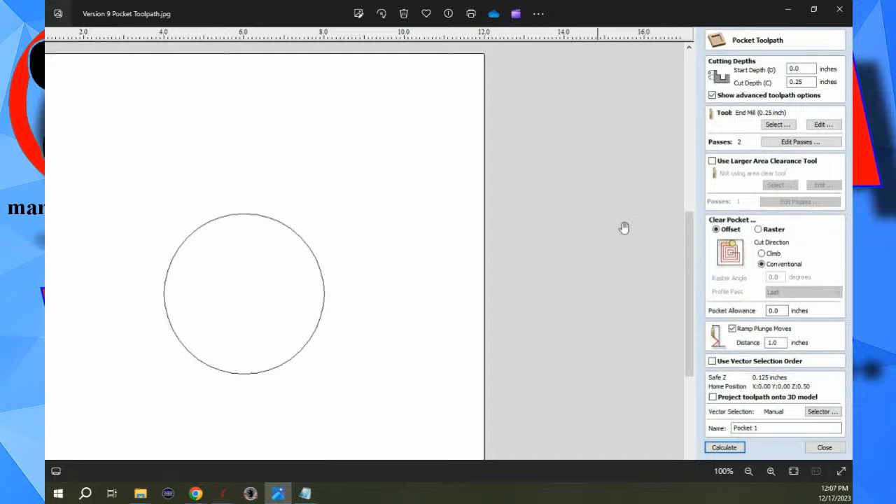And so you get into a situation where now I don't have an older version on this computer, so I had to take some screenshots. In the old version of V-Carve and Aspire, this is what the form looked like. You entered your tool up here. This is on a pocket toolpath. You set your cut depth over here. Then you had one checkbox to use a large area clearance tool. Then you would select that tool, and that was your only option. And so these older videos reflect this form.

In the V-Carve toolpath, it was much the same thing. You selected your V-bit up here, then you had the option to use a flat area clearance tool, and you could select one tool, and that was it. So as a consequence, those older videos reflect that same situation.

Well, now we have come into version 11.5, and if I select that vector and go into a pocket toolpath, the form has changed pretty dramatically. In the case of this pocket toolpath, I can select my basic tool that I'm going to use to pocket this out. But then I can come in and add another bit. For instance, let's say an 1/8 inch end mill. We'll select that and it adds it to the same list.

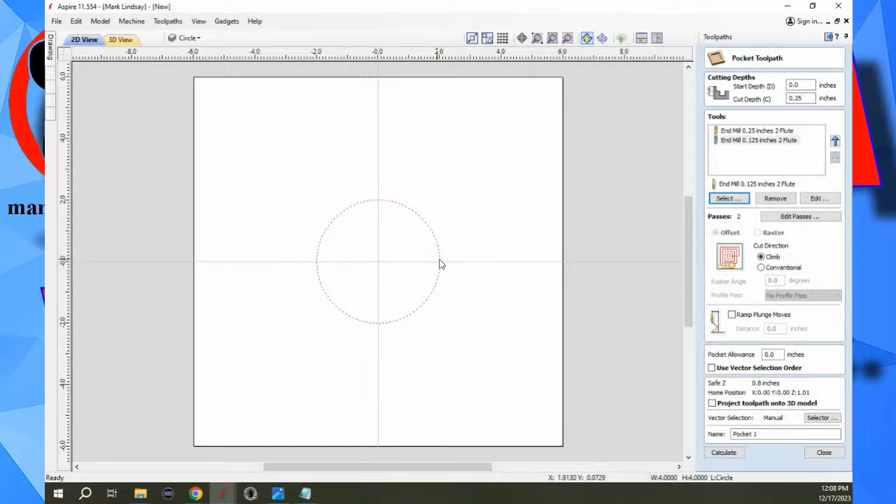I'm no longer restricted to adding just one extra bit for a large area clearance tool. I can add 4, 5, 6 bits. I haven't found a limit yet. So we've got a little bit more flexibility here. Now, if I go ahead and calculate this toolpath, we see that it makes 2 separate toolpaths. I had a question the other day in a comment on YouTube asking, is this normal? And the answer is yes, this is normal.

What it's doing is it's making one toolpath that uses that 1/4 inch end mill. Then it's making another toolpath that's using that 1/8 inch end mill. And that's exactly what a large area clearance tool is supposed to do. If you look at the title of this toolpath, it says Clear 1. That is your clearance toolpath, and that's fine. This one here is your final toolpath. That's using that smaller bit that's going to get in and trim right close to that vector as much as it can.

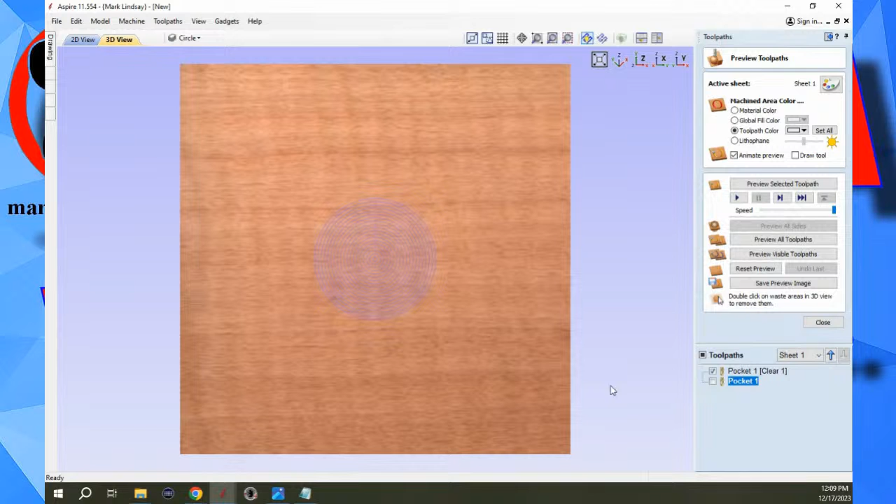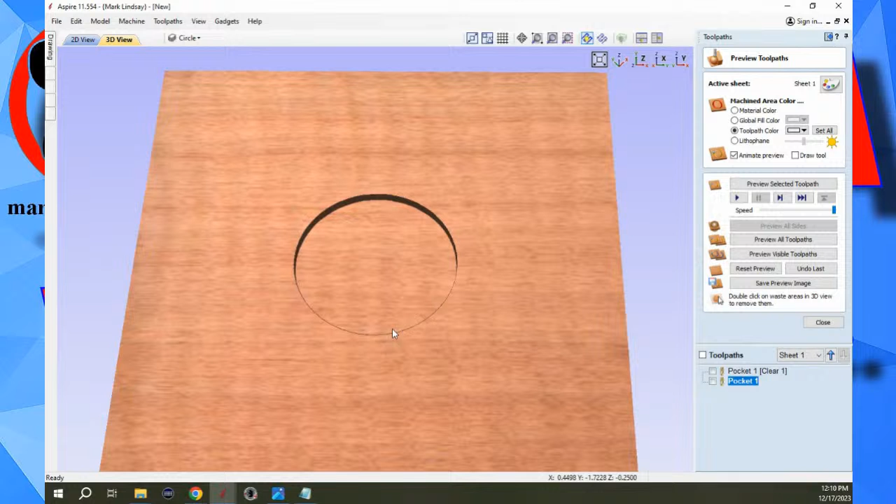Now I can turn off the visibility on this toolpath and we see how much smaller this clearance toolpath is. If I run this toolpath and kind of rock it off to the side so that you can see it, that's cleared out the bulk of the material. Now, if I preview this one, it's going to do that very slight cleanup profile pass. On something like this, where I've got a 4-inch diameter circle, it's not really necessary to use two different tools. I could reset my preview, go back into my pocket, and just totally eliminate this tool. I can just remove it.

A little word here about what I'm selecting. You'll notice I have my 1/8-inch end mill selected, and it's listed down here. If I click on my 1/4-inch end mill, now it's listed down here. This is done so that you can reset parameters on each of these bits individually. So if I need to change a feed rate or a depth of cut based on my material, I can just select that tool, come over here to edit, and edit the parameters of that tool.

So if I need to change my feed rate or my plunge rate, or maybe even my pass depth, if for instance I'm cutting in foam, I can go a lot deeper than a 1/4 inch per pass. I could go a 1/2 inch per pass.

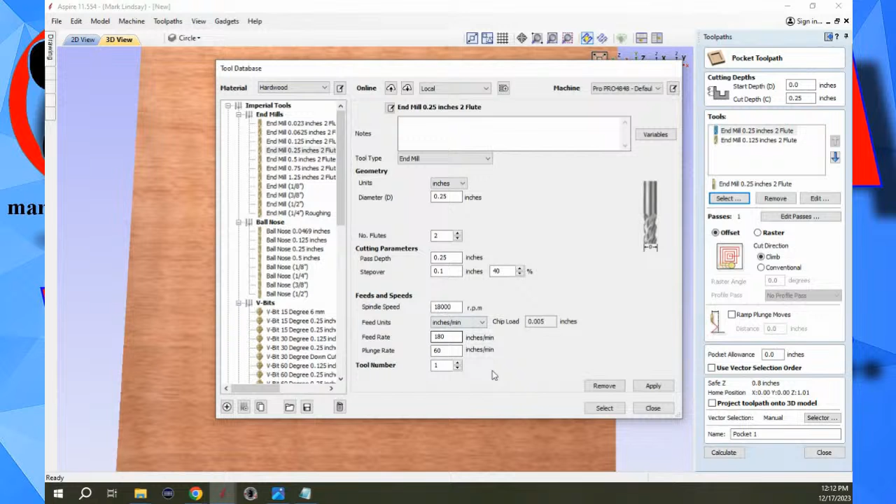I probably don't want to do that. So I'll close that without making any changes, and I'll edit those parameters using the edit button. And again, that affects this toolpath only. Okay. And it's similar with the V-Carve toolpath.

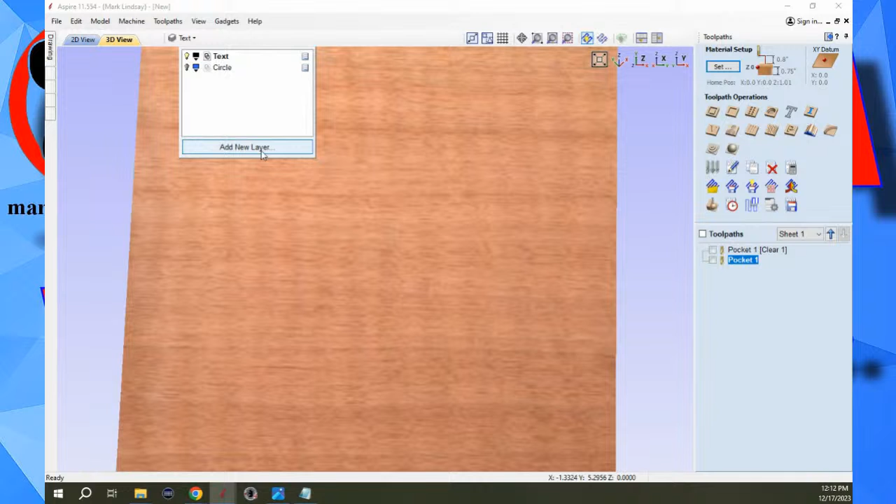Now I'm up here in my circle layer, but I also have some text. So let me close that, make text my active layer, click off, and now I have some text out here. It's similar with a V-Carve toolpath in that I can come over here and I can click in my V-Carve toolpath. I've got my vector selected, and now I'm going to select my V-bit. I am going to cut to a flat depth.

Let me stop right here and say that carving to a flat depth, there's some kind of misunderstanding out there about carving to a flat depth. I'm going to get into that in just a minute, a little bit more thoroughly here. But basically what I'm doing is I'm limiting the depth of that cut to 0.1 inches, not quite 1/8 of an inch, and about 2.5 millimeters deep is what 0.1 inches is. So okay, I'm not going to go any further just yet.

I'm also selecting a 90-degree V-bit, and we notice I have use clearance tools here. I've got it checked. I've got a very large tool entered in that. That's way too big. This 1/2 inch diameter 2-flute end mill, there's no way that's going to fit in there and clear anything out. It's 4 inches tall, but that's still, it may fit here. It probably won't. So I've got that tool selected. I'm going to remove it.

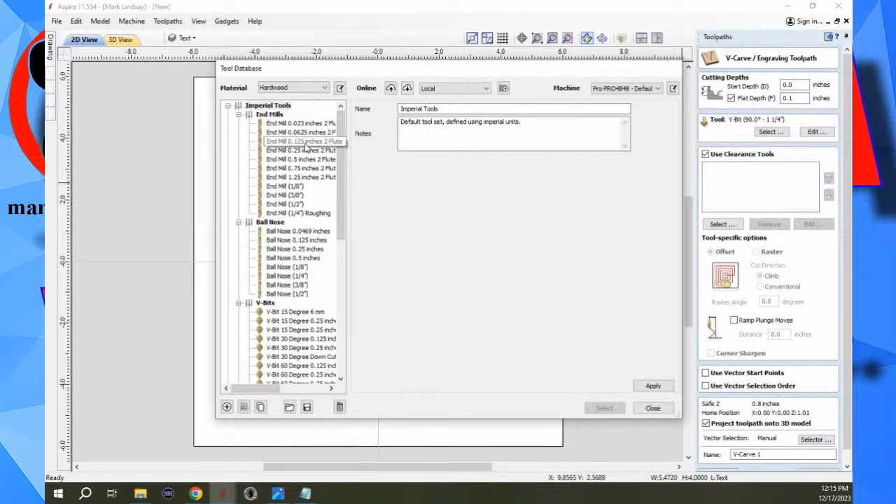Now I'm going to select another tool which will better fit within that text. And I think that's probably my 1/8 inch end mill. I'll select that. So now what's going to happen is this toolpath, when I calculate it, it's also going to calculate two separate toolpaths, one for that 90-degree V-bit and one for this 1/8" end mill. This is going to be the V-Carve clear toolpath. So I've got 2 bits for this toolpath.

Now, down here we get into tool-specific options. These tool-specific options will affect the clearance tool only. Whatever I set down here will not affect the V-bit. The V-bit is going to do what it has to do to carve this text out to a depth of 0.1. So this only affects this 1/8" end mill. Okay.

I have a choice of using an offset strategy, which means it's going to carve in a more circular pattern, or I can use a raster strategy. With a raster angle of 0, that means this bit's going to go back and forth and clear out this way. I don't want it to do that. I'm going to go ahead and go vertically. So I'll change my raster angle to 90 degrees.

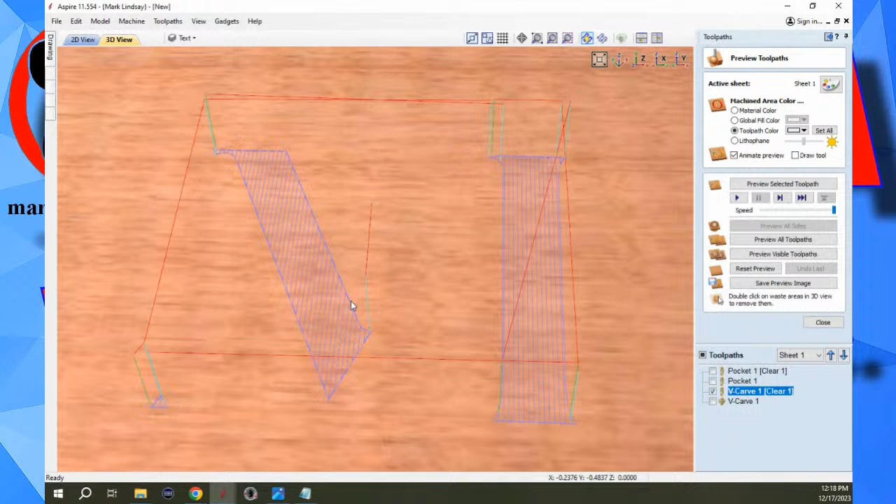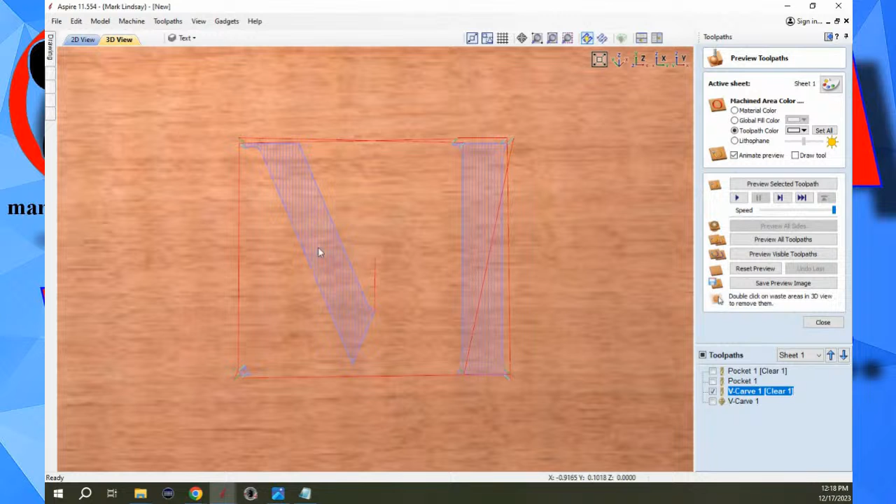When you're attempting to read a toolpath, just know that the red lines represent rapid moves. These rapid moves are with the bit lifted up out of the material. So we're going to start with my XY0 right here in the center, and it's going to lift up, go back to a straight Z view. It's going to lift up, move down here, then plunge in and start clearing this area out. Let me rock it back again here.

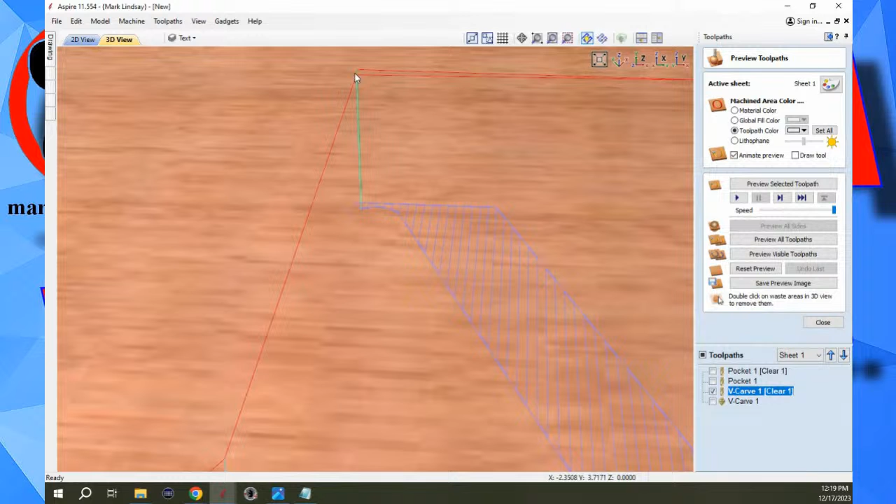And you'll see this light blue line. The light blue line is a plunge move. So it's going to rapid over. It's going to plunge down here and start clearing this out. We come over here and you'll see a green line. A green line is a retract. It's going to retract out of the material here, then rapid over to the next position.

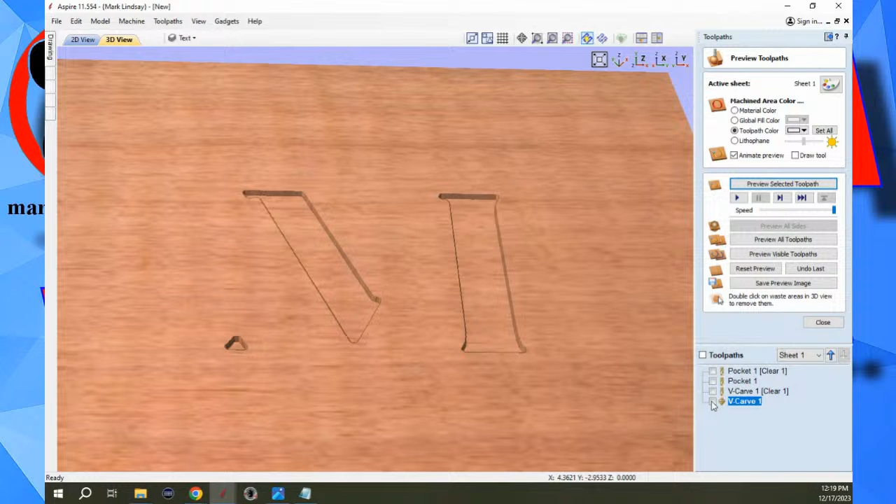So that's enough out of me on that. Let's go ahead and preview that one. And we see it has cleared out everything that that bit can fit down into. Now we'll come over here to the V-Carve toolpath and we can read what it's going to do. Again, the same thing. It's going to come over from my XY0 and it's going to go over to this side first.

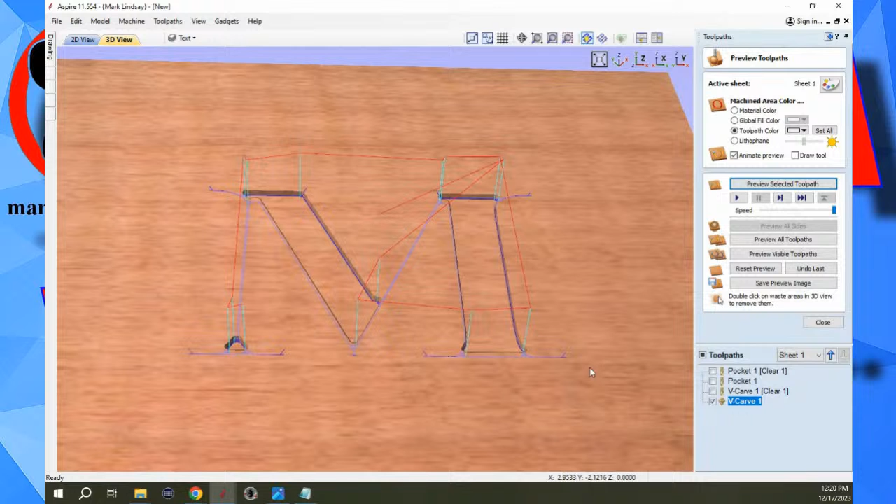And the dark blue lines are where the cuts are actually going to be. So it will do a little bit of clearance in here, but it will cut out my square corners, come back up around this way, retract out, and move over to the next position and start carving there. Let's go ahead and preview that. And we can see that's what it's done.

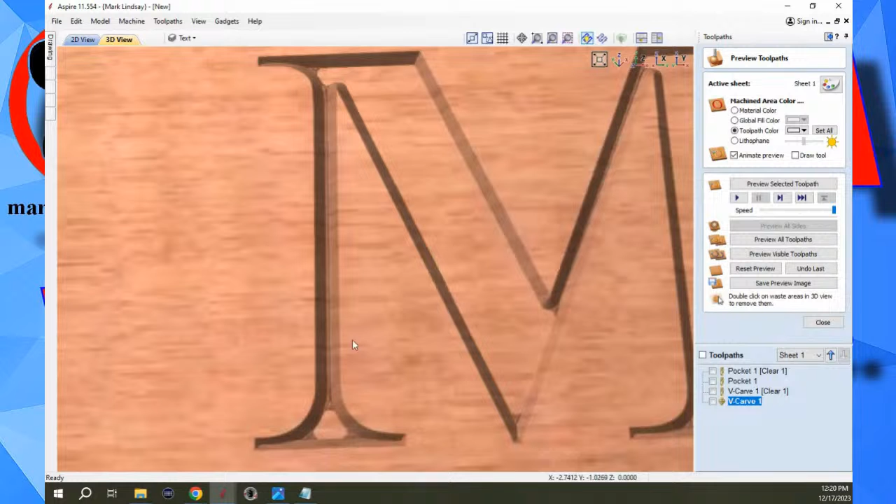You do not have to use clearance tools. You can allow that V-bit to clear this entire thing out. That will save you a tool change. But what you'll end up with, if we come in here and look real close, we can see a lot of ridges in here where that V-bit went back and forth to carve out this area that was too small for that 1/8 inch end mill to get into.

Now, depending upon the size of your text, that may not be a big deal to you. That may be perfectly acceptable. If you're going to fill this with a solid color of epoxy, that would be just fine. So it depends on what you're going to do. I generally find that using a sanding brush and a drill, or the Scotch-Brite radial sanding discs, is more than enough to clean this up in these smaller, tighter areas that are probably going to be painted anyway.

But it's very obvious that some sanding and cleanup happened in these larger areas. So that's when I tend to use a clearance tool. Not only that, this machine's a lot faster with a 1/8 inch bit than it ever would using that V-bit to clear all this out.

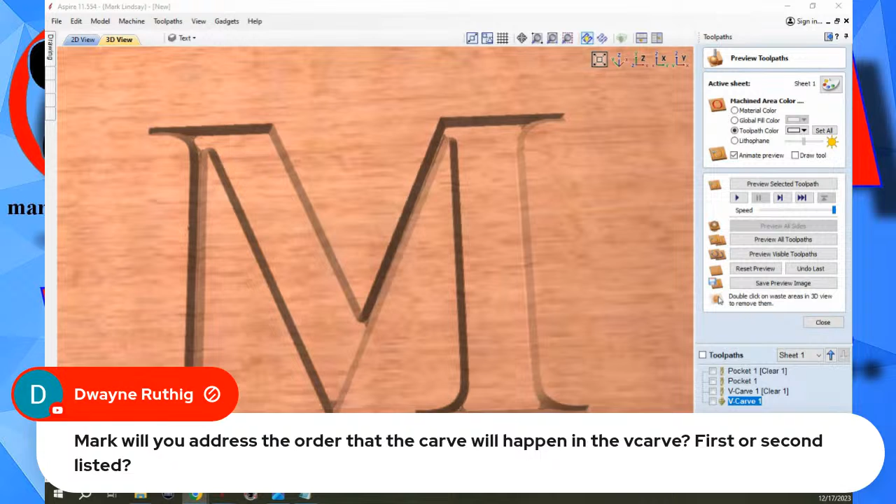So now I see a question out here. Dwayne's asking, will you address the order that the carve will happen in the V-Carve toolpath, first or second listed? I assume, Dwayne, you're talking about within the toolpath itself. The order that they're going to be calculated in, the V-bit will always be the final carve. It will always be listed last, without the word clear and then 1. That's always going to be your V-bit. Your clearance bits are always going to be the end mills you select.

Now, if I add another bit here, let's say a 1/4 inch end mill, and we'll select that, and we'll go raster on both of these with a 90-degree raster angle. And remember, the 1/4 inch bit is what I have selected. The 1/8 inch bit, it remembers what we're doing. It will calculate a separate toolpath for both of these, as well as the 90-degree V-bit. So let me go calculate this.

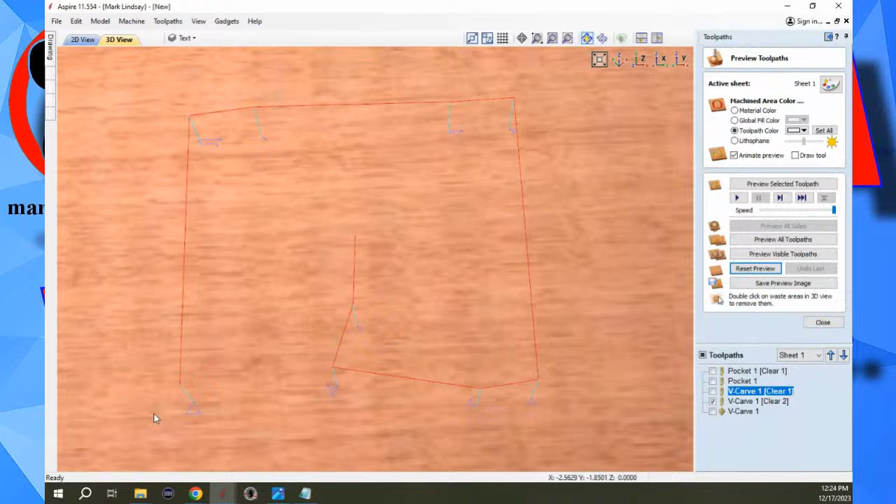And now I have V-Carve. I have V-Carve Clear 1, which uses that 1/4 inch end mill. V-Carve Clear 2, which uses the 1/8 inch end mill. So let me reset my preview. We have all of them selected. Let me turn off these two. That's what the 1/4 inch end mill is going to clear out. Then I'll turn on this one. This is what the 1/8 inch end mill is going to come in and clear out. And then this is what the V-bit is going to come in and clear out.

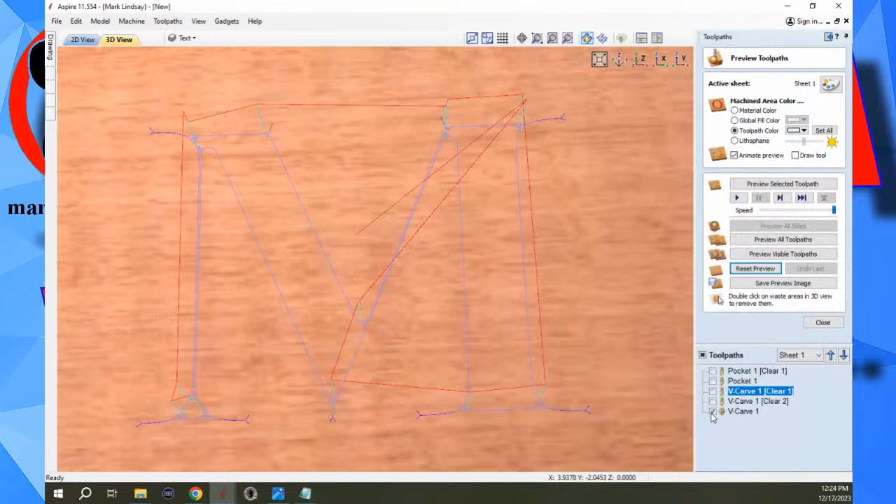Now, yes, you can use multiple bits, but if it's not, strictly speaking, necessary, I wouldn't. I mean, yes, it's great to come in and clear all this out with the 1/4 inch bit. Let's again take a look at that. And that may be all you need. You may not need this 1/8 inch bit at all.

So let's go back into it and let's remove that 1/8 inch bit. Before I do that, if that's not what you meant, if what you meant by that was the order that I have them listed here, let's take a closer look. If I just close this and I put my cursor over clearance 1, that is the 1/4 inch end mill.

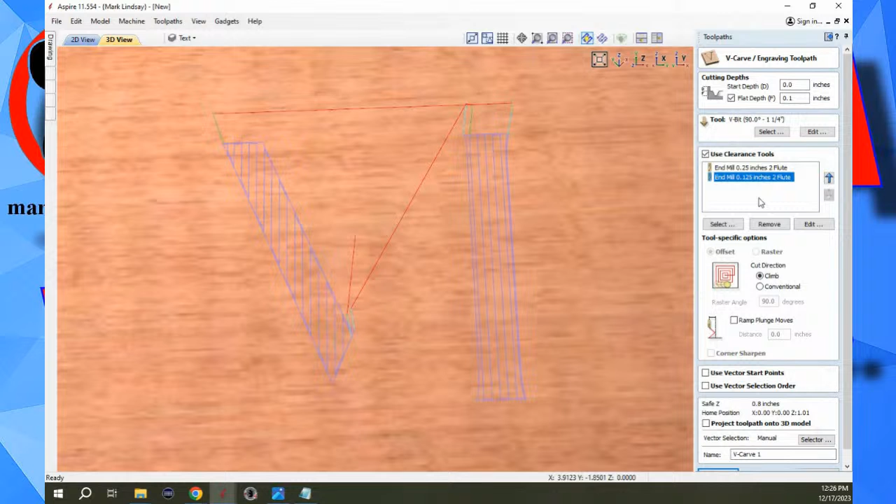Now let's go back in here and look. That's clearance 1 because that's the first bit listed up on top. This is clearance 2 because that's the second bit listed. I can change the order, and that's also going to change the order they're calculated in, but it's only going to affect really the title of the toolpath.

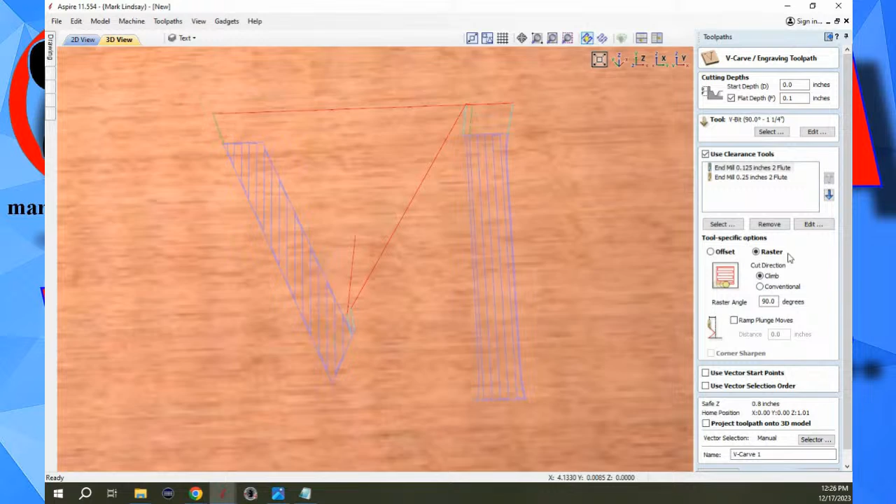So let me go ahead and move that up. So now I got the 1/8 inch up above instead of the 1/4 inch. And it automatically wants to go back to offset. I'll put it for raster and I'll calculate. And now it's telling me that my 1/4 inch end mill won't fit into the vectors.

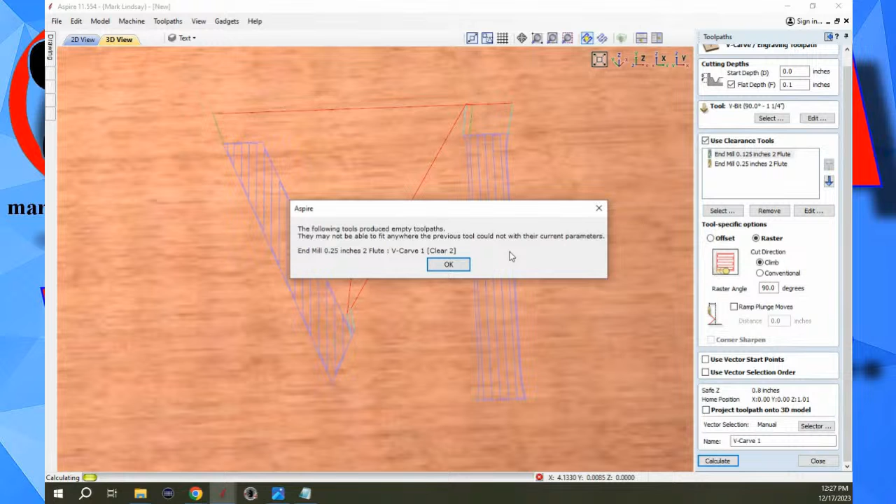Well, we know it will, but because I'm using that 1/8 inch as the primary clearance tool, it no longer needs that 1/4 inch. So there's nothing left for it to machine away that this bit can fit into. Let me go ahead and turn this one off, and that is the 1/4 inch end mill. It didn't create a toolpath.

There's nothing for it to clear away because we changed the order and made my 1/8 inch first. It's going to calculate that first. Then there's nothing left for the 1/4 inch to carve away. So let me move that back down and we'll calculate. And now it calculated them just fine, knowing that clear 1 uses the 1/4 inch end mill, and clear 2 uses the 1/8 inch end mill.

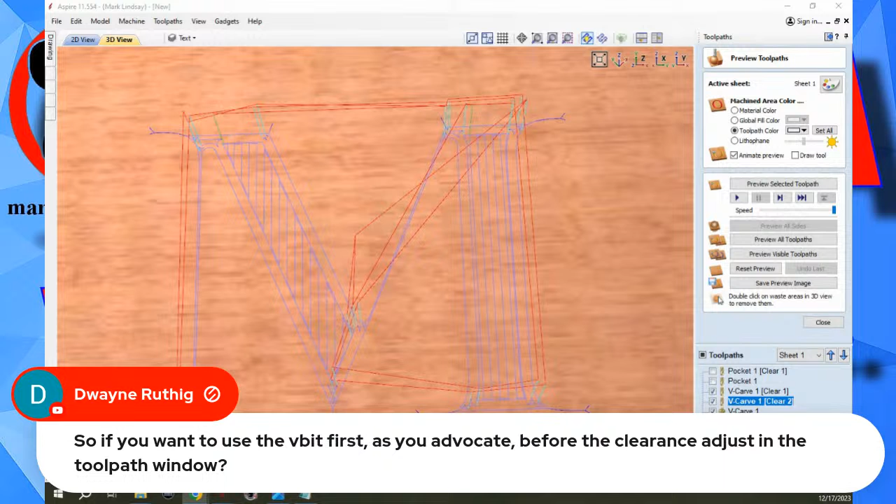So if you want to use the V-bit first, as you advocate, before the clearance, adjust in the toolpath window? No. It depends. Well, let me back up and regroup on that. The software is always going to calculate the V-bit toolpath separately without a clearance identifier at the end. So that's always going to be a separate toolpath. These are also separate toolpaths. Now it gets down to how you save your G-code.

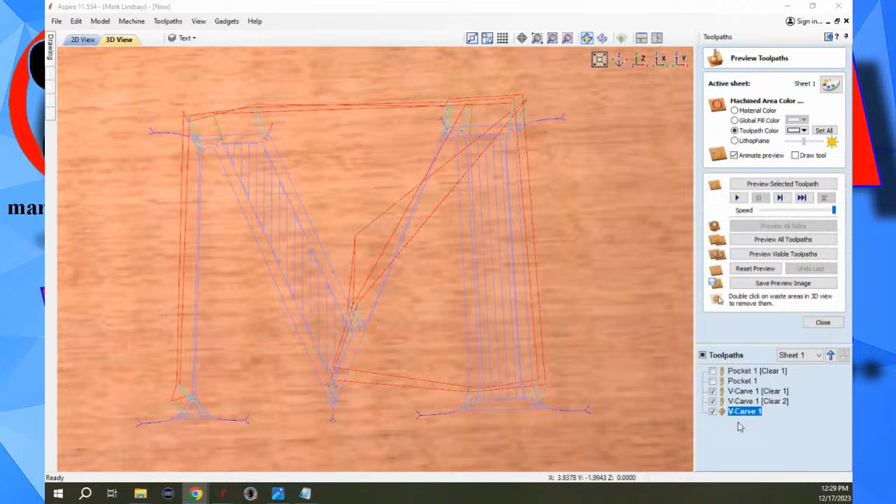If you use a post processor that recognizes an automatic tool changer, you can save this all to one piece of G-code. But if you don't use a post processor that recognizes an automatic tool changer, you would save this off into separate toolpaths. Now, as Dwayne hinted, I'm an advocate of running the V-bit toolpath first. And that's mainly because I find I get a better outcome.

So let's run that V-bit toolpath first. What it does, it has support all the way around the entire vector. In this particular instance, it's not really easy to see, but for instance, down here where you've got this inside angle for the letter M, if I have already cleared all of this out, then I come back and run my V-bit, there's a distinct chance that I can chip off the tip of this M and break it loose, because there's no support around it.

But by running the V-bit first, it's going into a solid piece of material. Everything is nicely supported. So that comes down, Dwayne, to just running this toolpath first. Then come back and run that toolpath, then come back and run this toolpath to clean up the rest of it. So I just prefer to use all of my V-bit toolpaths first. So there's really no adjustment needed up here in the toolpath order, because this toolpath order will only affect your clearance tools.

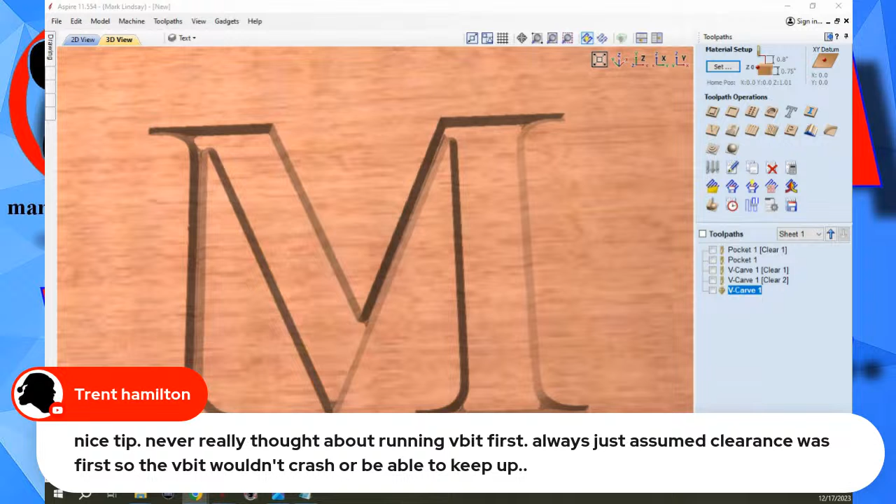Trent Hamilton says, nice tip. Never thought about running a V-bit first. Always just assumed clearance was first so the V-bit wouldn't crash or be able to keep up. About the only time you have to worry about that, Trent, is if, for instance, I were going to V-carve something down inside this pocket here. If I were going to carve something down in the bottom of that pocket, then I would have to be concerned with crashing over here.

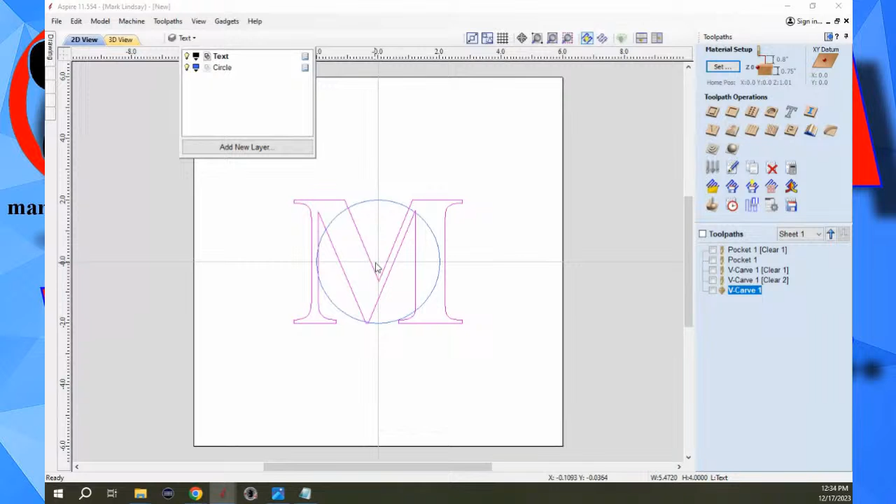Maybe, maybe not. It just depends. If you've got a particularly deep pocket, you would have to be concerned with a crash anyway, and you'd have to use a bit that would reach down in there and wouldn't give you a bunch of tool deflection. But generally speaking, if you're flat carving into the surface of material, I run the V-carve, the V-bit first, and then come back and do my clearance pass.

Eyal Peleg says, possibly, Mark, if you have numbered the tools differently, maybe your post processor would stop for a manual tool change. No, my post processor, even though it uses different tool numbers, will come up and say the geometry is different. And that's simply because my post processor does not recognize an automatic tool changer. If it does recognize an automatic tool changer, it will save it all to one G-code file. This is really getting in the weeds. And then it will give me time for a tool change.

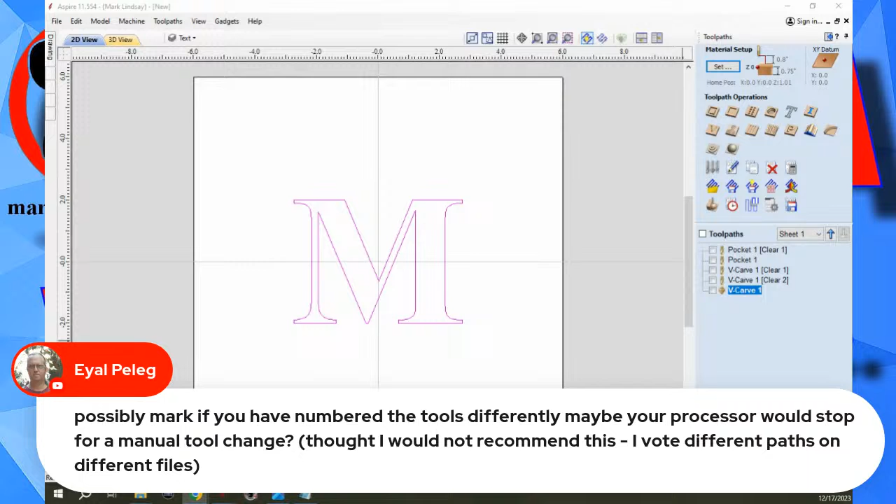I don't like to do it that way for the reasons I outlined. I want to be in control of when I run that toolpath. I have no need for an automatic tool changer, so I'm not going to get one. I don't see any reason to have one. Just a lot of money for something that I'm not going to use. So let's see here. We had another.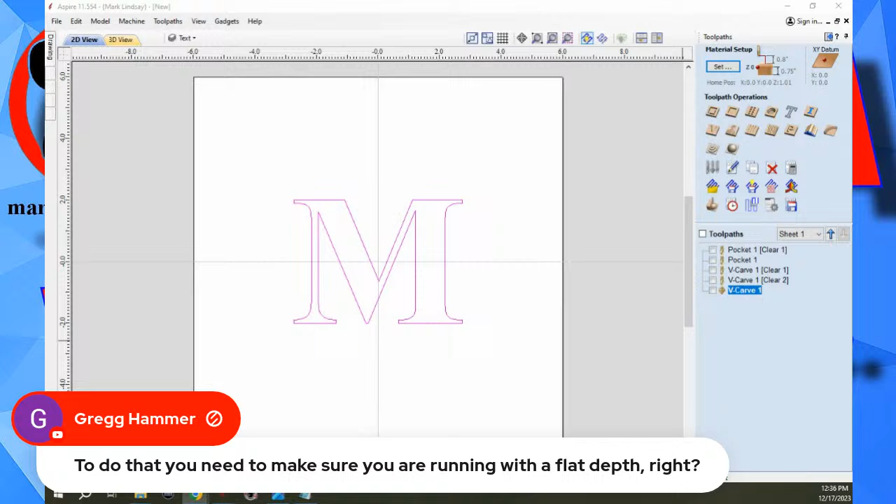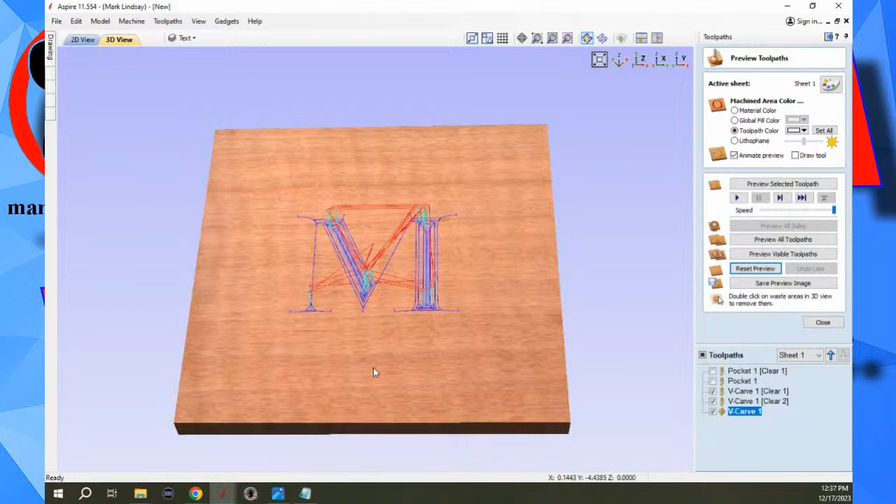Okay. Gregg Hammer says, howdy, Gregg. To do that, you need to make sure you're running with a flat depth, right? That was the next thing I was going to get into. You do have to have a flat depth selected in your toolpath to even use this. If I turn off the flat depth and I calculate the toolpath, what's going to happen now? I'll reset the preview. I'm still going to be able to use these two tools, but it's going to change what those tools clear out.

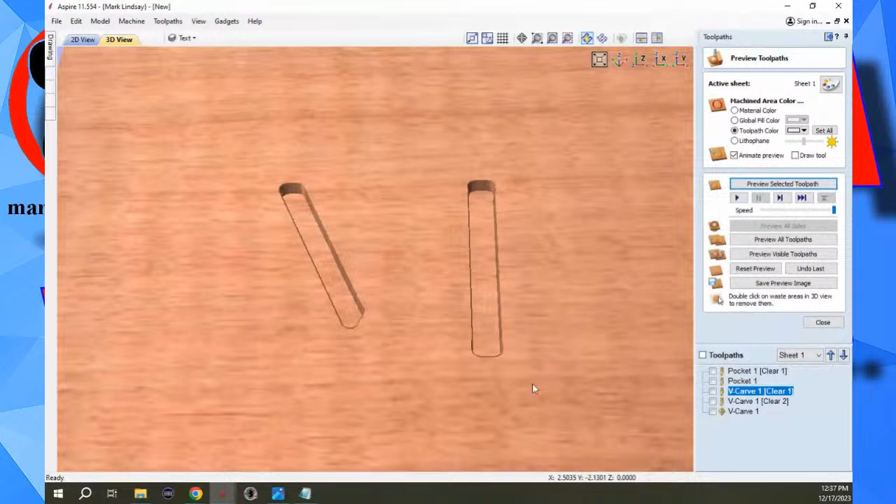So my first toolpath is just going to basically take two quick swipes this way, and this is going to clear out a little bit here. We'll preview that. Whoops, I just previewed all of them. Reset preview. That's the one I want to preview. Come on, Mark. So that's all that's going to clear out. Then I can come in and use this one, and that'll clear out a little bit more.

And now my V-Carve is going to clear out the remainder and give it that finished V-Carve look. Now, if we take a look at how deep that's going to cut, I put my cursor down in this trench, for lack of a better term. Look at my readouts right down here. Pay attention to the Z. Look how deep we're cutting. We're cutting 0.45, 0.46, I saw,

0.47, 0.4779. So not quite a half inch, but pretty deep. If I want to know exactly how deep that's going to cut, I can just put my cursor right there, and we can see in that little bubble, 3 lines up from the bottom, the max depth it's going to cut is 0.4851. That's going to be carving pretty deep. Now, that may be the look that I'm looking for, and that may work out just fine.

And then we get into the situation where the V-bit would be the last thing I run. Because the whole reason for these clearance toolpaths is to hog away most of the material to make it easier work for that V-bit. So in this situation where I'm not using a flat depth, I would run the V-bit toolpath last. We may have some problems with inside angles like this. We may not. Usually we don't.

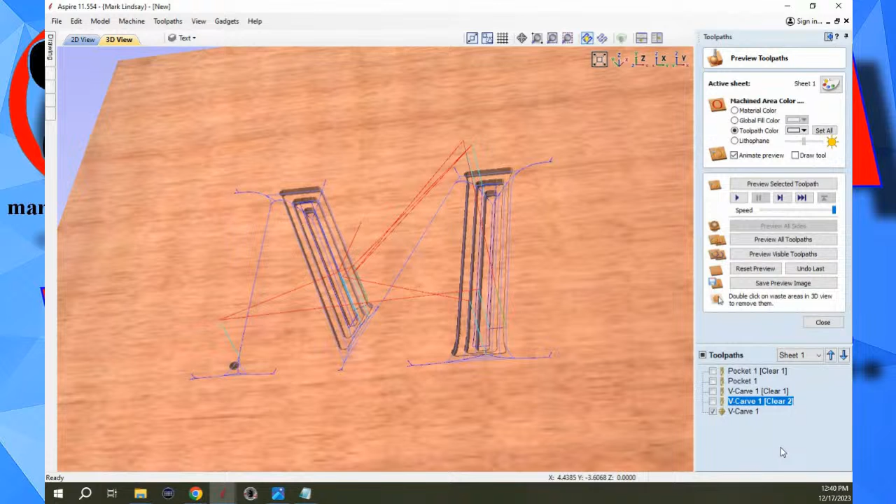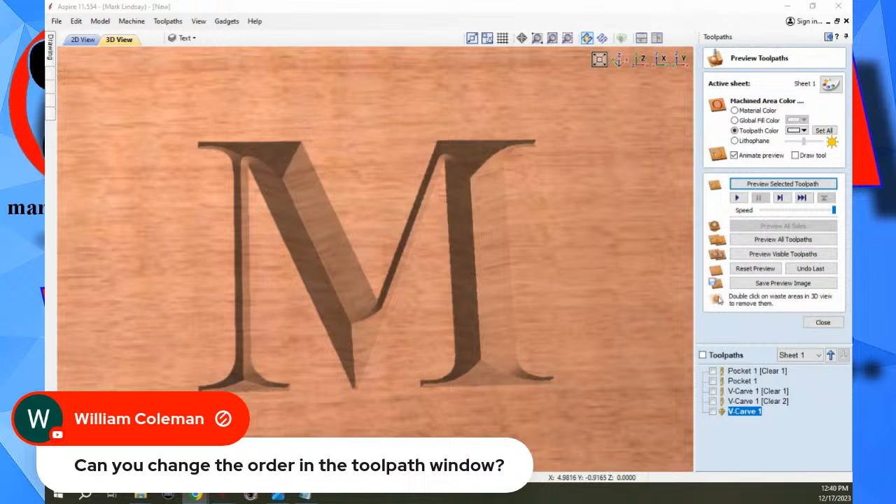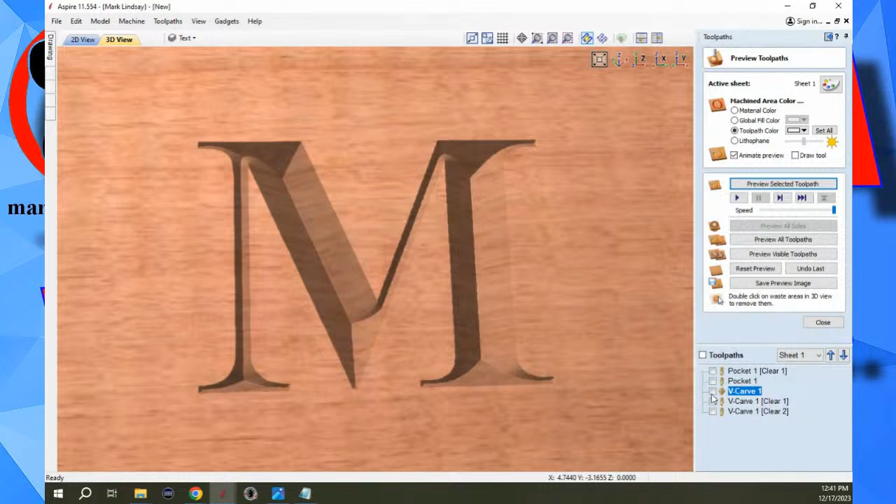So we'll go ahead and we'll preview that, and that's where we get that deep beveled look, that deep chiseled look there. So let's see here. Bill Coleman was saying, can you change the order in the toolpath window? Yes, you can. Right here, you can change the order if, for instance, you want to preview all toolpaths. I've got V-Carve 1 selected. I can bump it up, and then I would want to go with the 1/4 inch bit, then the 1/8 inch bit. So now if I preview the visible toolpaths, that's still in the wrong position.

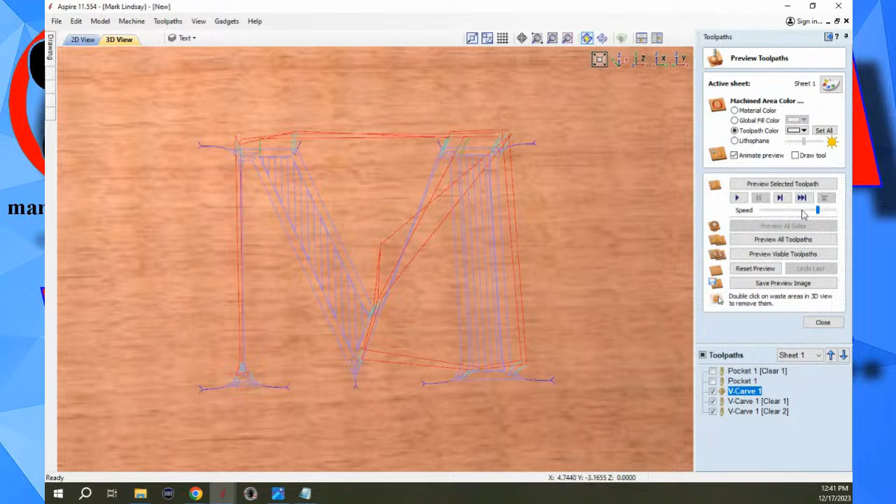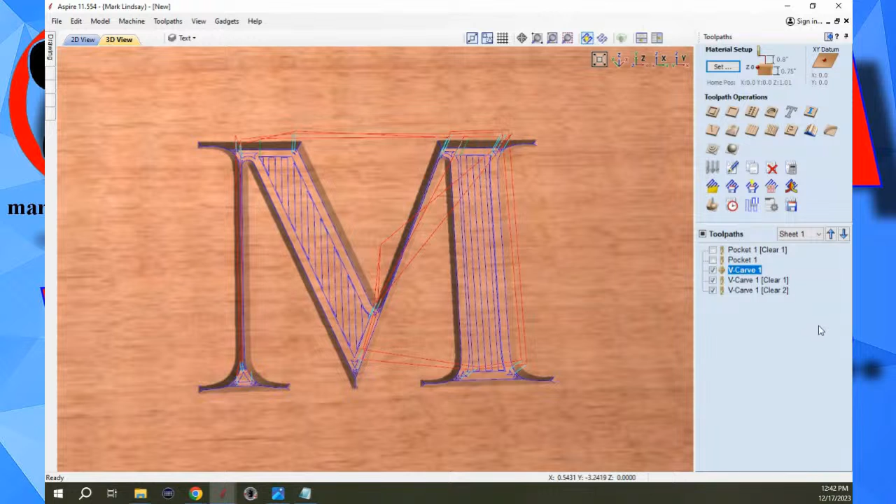Well, that's all right. If I go back to my flat depth, 0.01, calculate, reset the preview. Now if I preview my visible toolpaths, and let's slow the speed down a little bit so you can see that it's actually doing them one at a time. Now it'll do the V-bit first, then come in with the 1/4 inch, and then with the 1/8 inch. So yes, you can change these positions as well. But this affects really the preview only. I still get the same end result if I try to save the G code.

And all this is what I was talking about. These two toolpaths right here both use tool number 1, but the geometry of the tools are different. So it does take tool 1 into consideration, but that's not the defining factor. The defining factor is the geometry of the tools. So that's why it wouldn't let me do it. It didn't have anything really to do with the tool number.

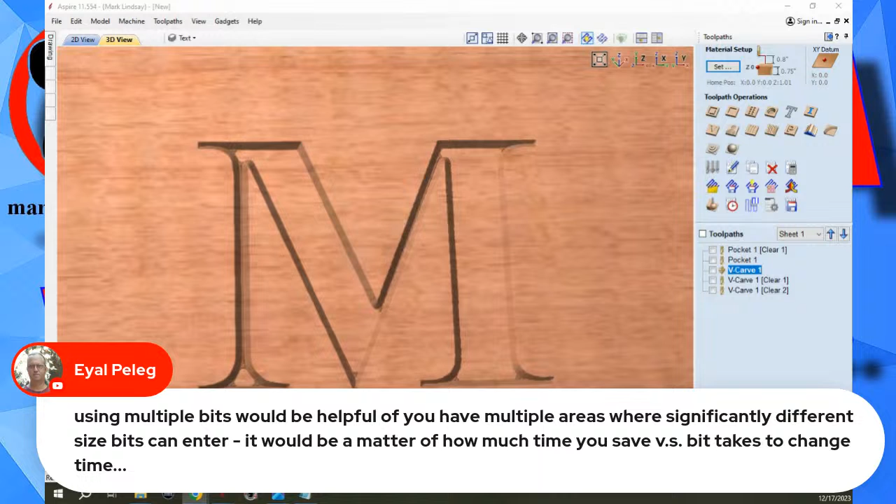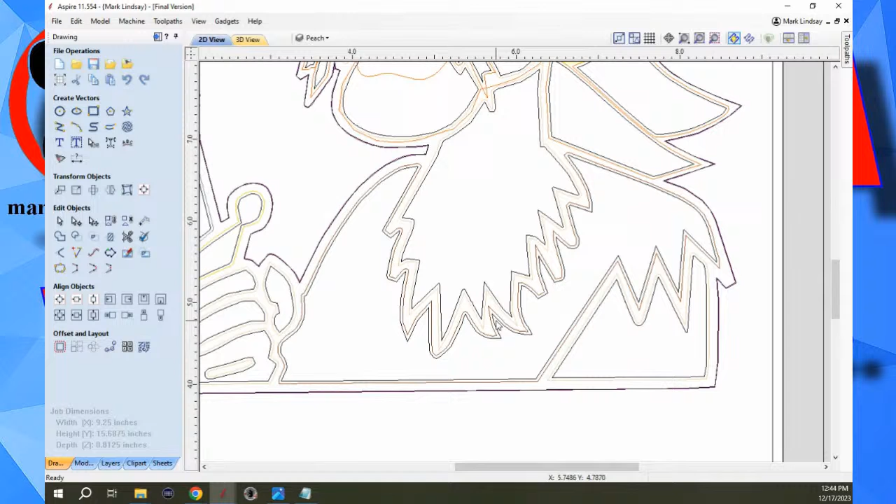Now, you also said, Eyal, using multiple bits would be helpful if you have multiple areas where significantly different size bits can enter. It would be a matter of how much time you save versus the bit change time. Yes, absolutely. As an example, let me go back over to my good old pirate here, where you have areas like this, and this is just a V-Carve toolpath. You have this selection here. That's a big area. So using a 1/4 inch end mill would clear this out really fast. But that 1/4 inch end mill is not going to get up in here. So I would use an 1/8 inch end mill to get up into these points a lot closer.

Then in the case of this pirate, if we look at all the toolpaths I have, this area right here, I'm using a 15-degree V-bit. So I want that 1/8 inch toolpath to get up in here as close as it can, so that little 15-degree V-bit isn't spending a lot of time clearing everything out. I can see my 1/4 inch end mill can do all of this out here. And then my 1/8 inch end mill can get up tighter into these corners.

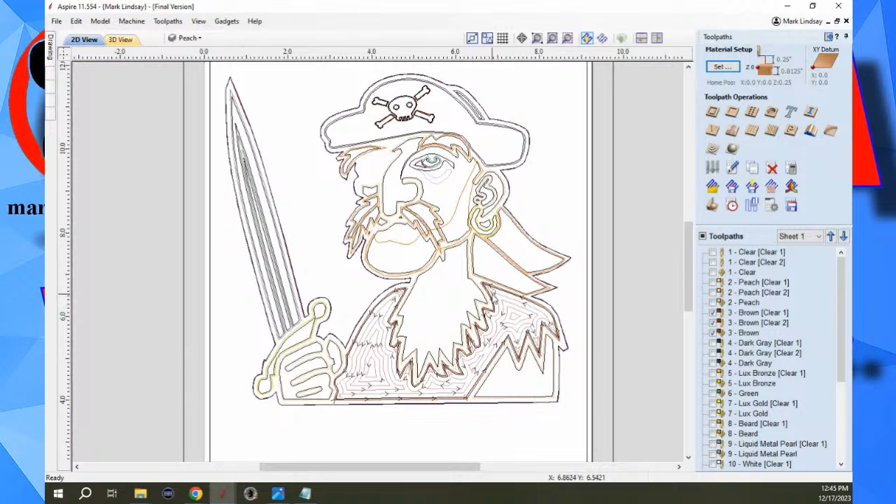Now, if I have more vectors up here that use the same bits, the software knows to calculate those toolpaths for those areas that that bit can fit into. It's not going to try to force anything. So that's where it comes in real handy. Whoops, I added the wrong one there. Where you have a large number of fine tight areas or a large number of vectors spread out over a huge section.

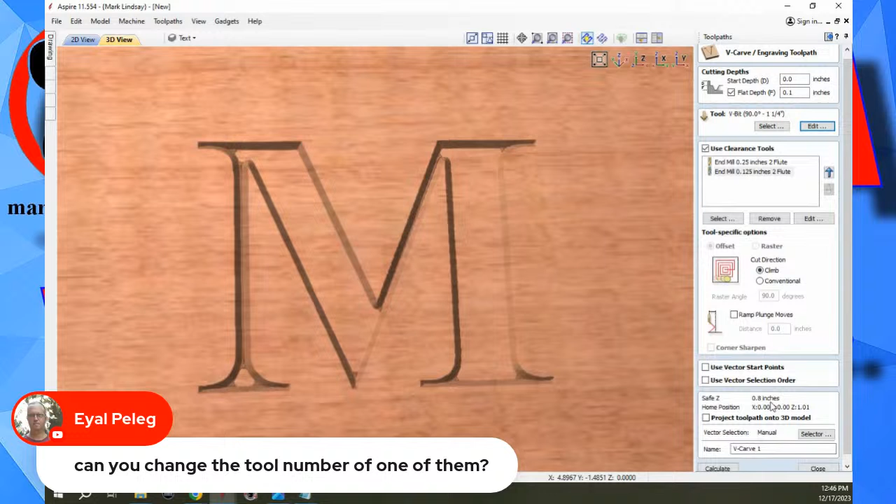So that's where all of that comes in very handy. Yes, I can change the tool number of one of them. Let's do this one. And I've got my 1/8 inch end mill selected. There, I've changed the tool number, calculate it, select all three, and it still won't let me change. It still won't let me, both use tool 1. Well, we know that's not the case because I just changed that. Nope, I didn't accept it. That's right.

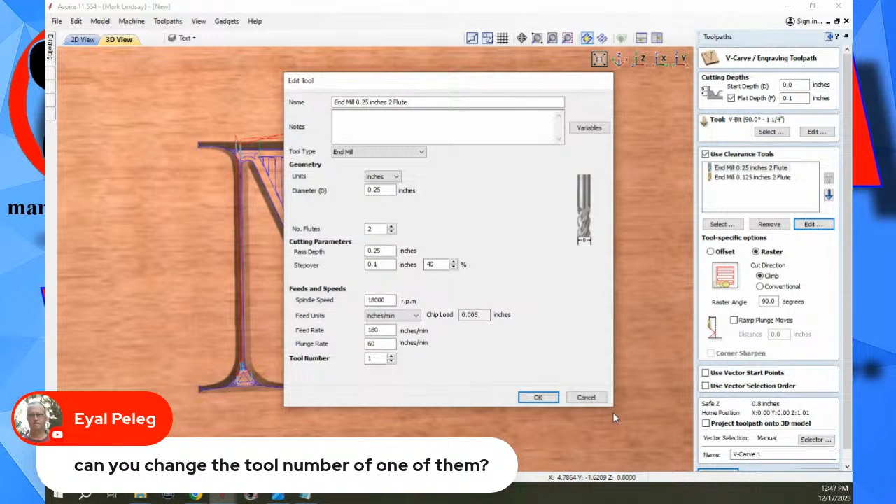Tool 1, 2, 3. Okay. Did it go back to tool 1? Come on. Well, let's try. Let's see. Both use tool number 3. What did I do? Did I make that mistake? 1/8 inch end mill. Edit. Let's make that tool 5. Okay. Now let's go into my 1/4 inch, and that's tool 1. Okay. All right. Close that, and it doesn't matter. Oh, that will save it to one tool path.

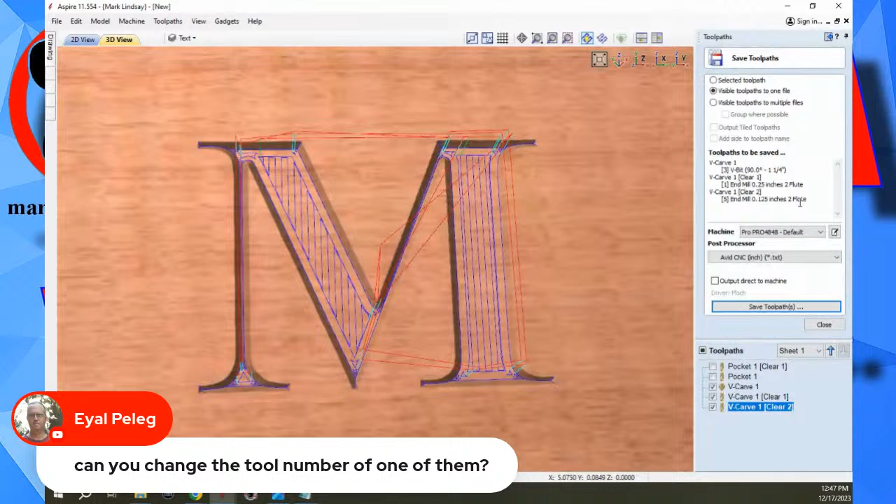Wow. I guess that post processor does recognize an automatic tool changer. Well, I learned something. I still don't want to do it simply because I want to be in control of when these tool paths run. This is not dependent on the software. This is dependent on your post processor. Okay? If you want to save all of your tool paths to one piece of G code, be my guest. I don't do that. I will not do that.

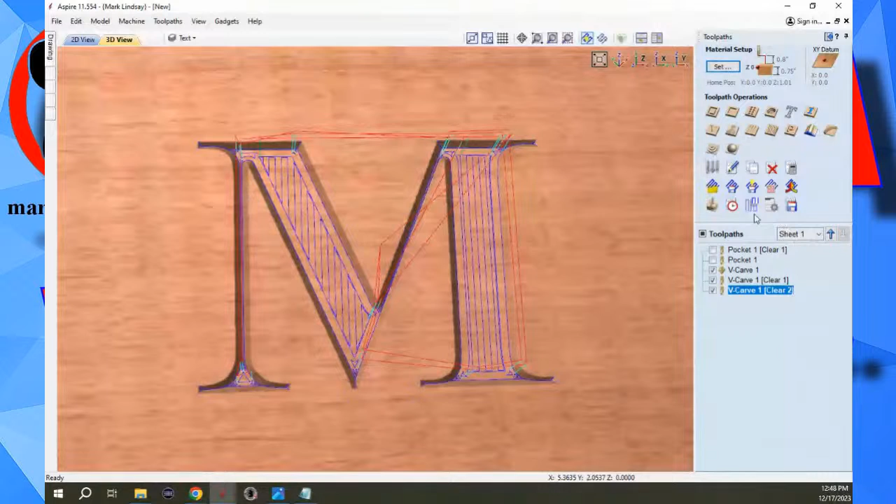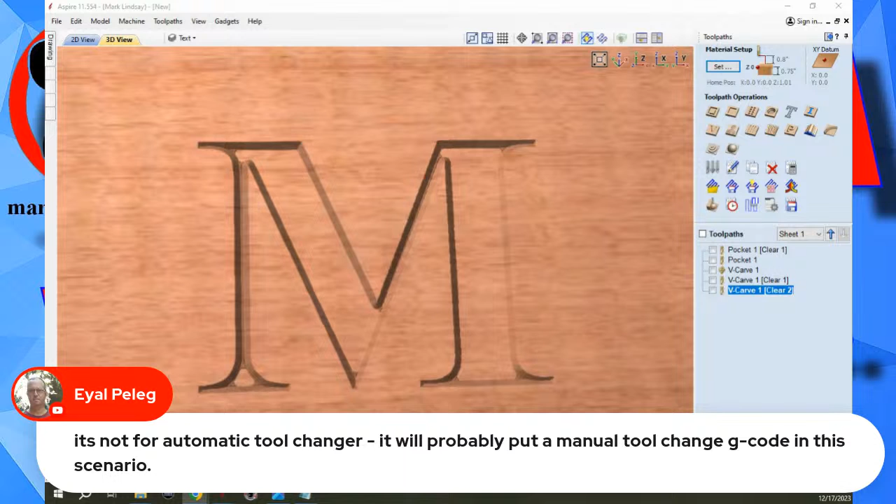So that surprises me that it did that, because normally with different geometry, it will not allow you to do that. Wow. Well, I learned something. It's not for automatic tool changer. It will probably put a manual tool change G code in this scenario. That's up to how you have your controller software set up. What your controller software does with that tool change G code is dependent upon how you set it up.

You can set up that controller software. We're really getting in the weeds here, getting away from the basics. You can set up that controller to treat this as a manual tool change, but you can also set it up for an automatic tool change if your machine is so equipped. It's going to throw the same M codes. I want to say M5, but I don't remember if that's it. Again, I don't have an automatic tool changer. I see no need to get one, so I haven't explored it.

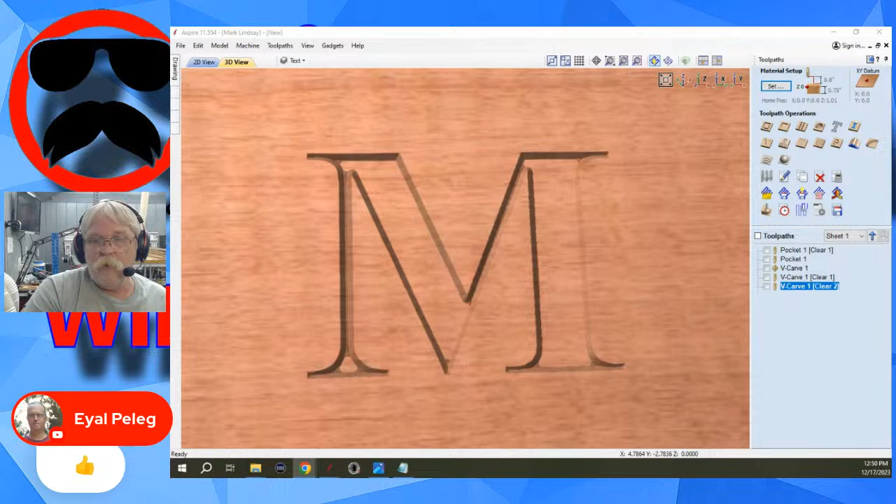Let's see. For Greg, we were talking earlier, oops, wrong one, there it is. We were talking earlier about a flat depth. Okay. What a flat depth does, a flat depth restricts how deep the tool is going to carve. It will not force your tool to cut deeper. Okay.

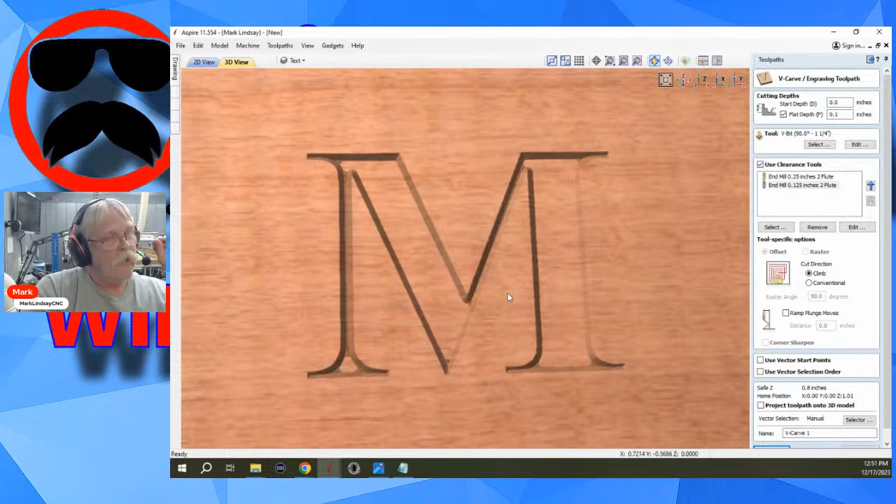If, for instance, this is 4-inch high text. If I was going with 1/4-inch tall text instead of 4-inch, and 1/4-inch is roughly 6 millimeters, a little bit more, this 90-degree V-bit would cut very, very shallow. And these narrow lines here, it may or may not even scratch the surface. You cannot use a flat depth to make a bit cut deeper. All a flat depth will do is restrict how deep it can cut. It will not force it to cut deeper.

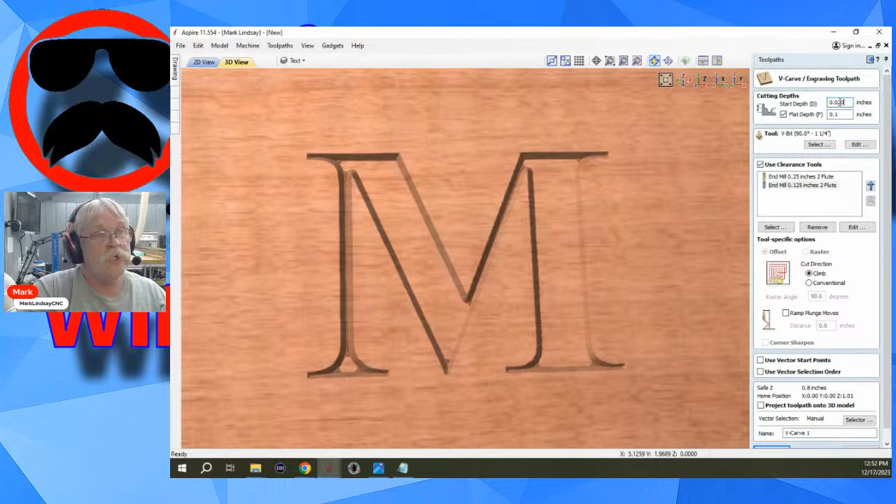There are ways you can make it cut deeper. You can add a start depth of, let's say, 0.020, and that will make this toolpath carve 0.020 deeper, because you're telling it you want it to start carving that deep. Generally speaking, unless you plan on surfacing a lot of this away, that's not a very good thing to do, but it can be done.

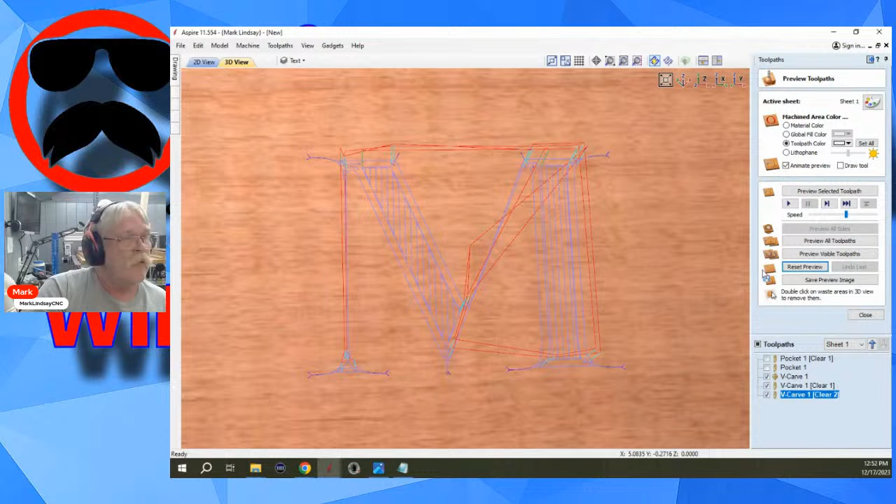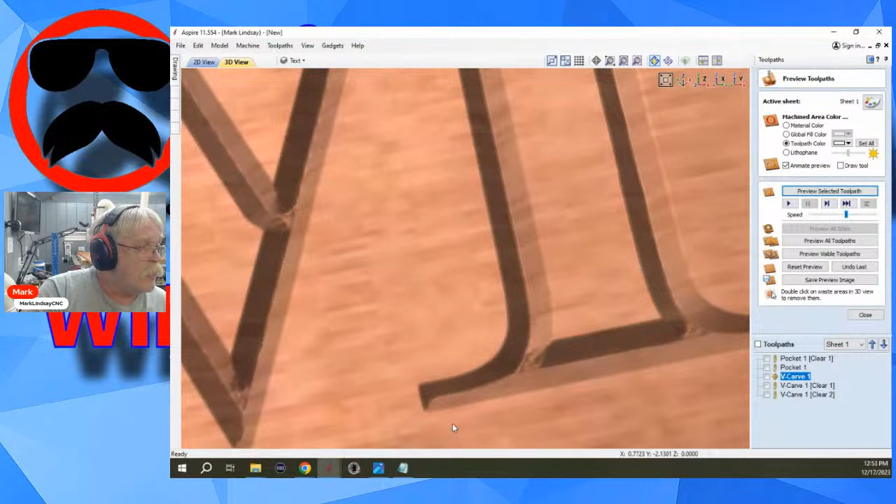So let me just preview the V-Carve to see what that looks like. Now that forced that bit to carve 20 thousandths deeper. And it doesn't really look all that bad until you zoom in and you start seeing that your sharp corners are not quite as sharp as they were. Your sharp external corners have a little bit of a radius because that tip is only going to go up until it's that 0.020 below the perceived surface of the material. It's not going to come up and all the way out.

And this is more dramatic the deeper you go. It can also force letters to kind of blend into one another. If I had, let's say for purposes of discussion, a letter I sitting right here, it could cause these serifs to blend in with one another so that there's no space between the letters.

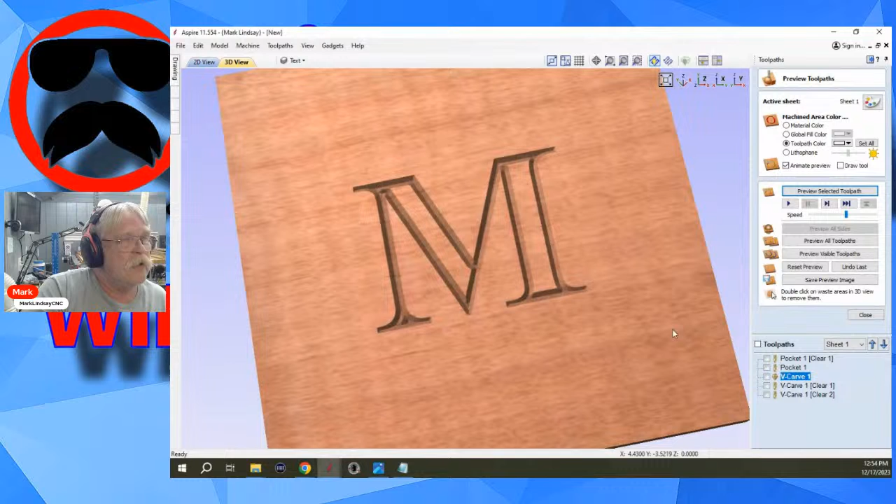So it can be done. Generally speaking, though, there's no reason. The basic rule of thumb is, and has always been, if you need a V-Carve to cut deeper, you need to switch to a bit with a steeper angle.

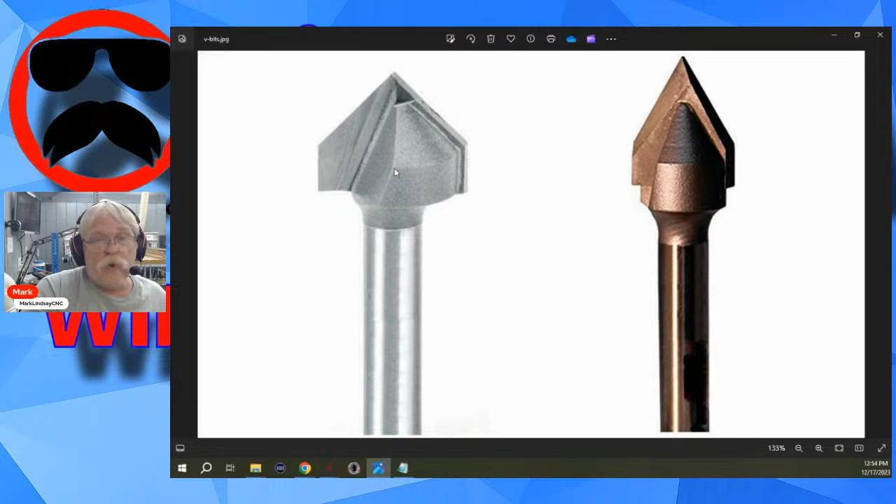What I mean by that is, go all the way to the beginning. Here we go. This is a 90-degree V-bit, and this is a 60-degree V-bit. The lower the number, the steeper this angle. The higher the number, the more shallow this angle. This is a 90-degree V-bit, meaning from this corner right here up to the tip and then back down to the other side, that's 90 degrees. On the 60-degree V-bit, from this corner here to the tip and then back to this corner here is 60 degrees.

I have 90, 60, 30, and 15-degree V-bits. So you can imagine what that looks like. 15 degrees, they will bite. So when you have one chucked up in your spindle, be careful around the tip of that V-bit. They bite. In using a steeper V-bit, we have to get into how the software calculates the toolpath for it to make a whole heck of a lot of sense.

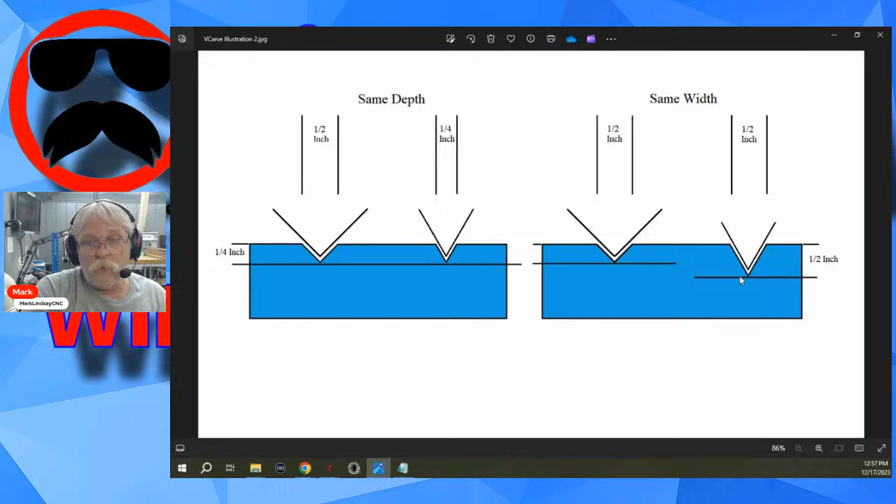By the same token, if you have an area that's 1/2 inch wide, or roughly 12 millimeters, that 90-degree V-bit will cut that same width a lot shallower than a 60-degree V-bit will. So if your 90-degree V-bit is cutting too shallow, you need to switch over to a 60-degree V-bit and preview that. If you use too steep of an angle to where it's going to cut through the backside, the software will warn you. You will get an error message, and I'll demonstrate that error message. Now watch, it won't do it.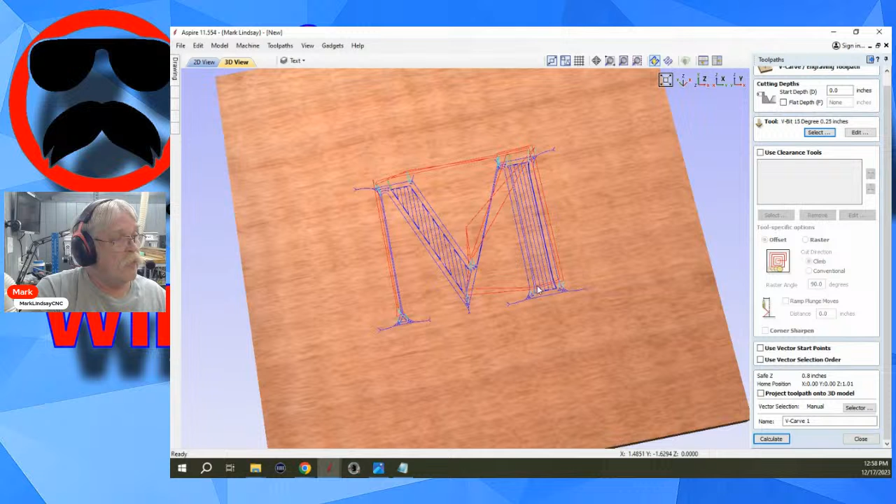I'll preview this. I'll come in and I'm going to remove the clearance tools. I'm going to change my V-bit to my, I believe it's this. No, it's my 15-degree V. That's the one. I'll select my 15-degree V-bit, and I've removed my clearance tools. And I'm going to take off the flat depth. So it's going to cut as deep as it needs to go to clear this entire letter M out. We'll calculate.

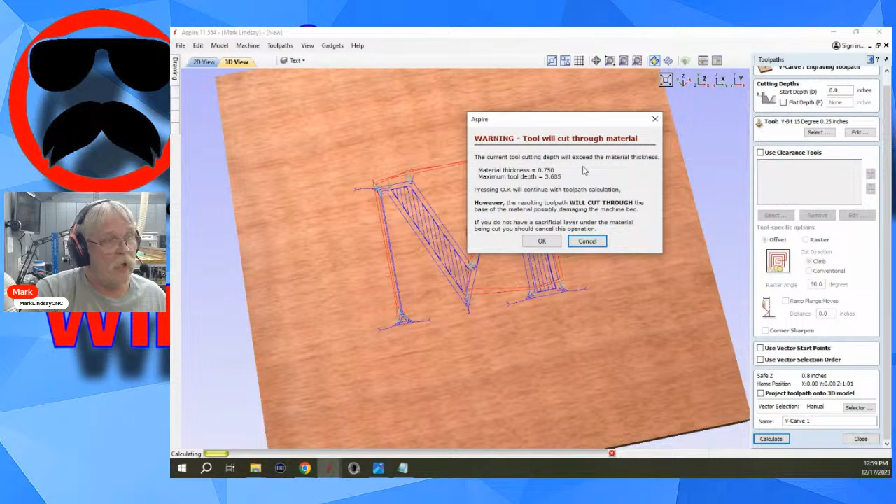It's telling me here that without a flat depth, the tool is going to have to cut 3.6 inches deep to carve out this entire letter M. And my material is only 3/4 of an inch deep. So you will get this error message. It'll still let you calculate it, and it'll still let you preview it. And it's just going to take it forever to carve all the way down, but it will start cutting through the material.

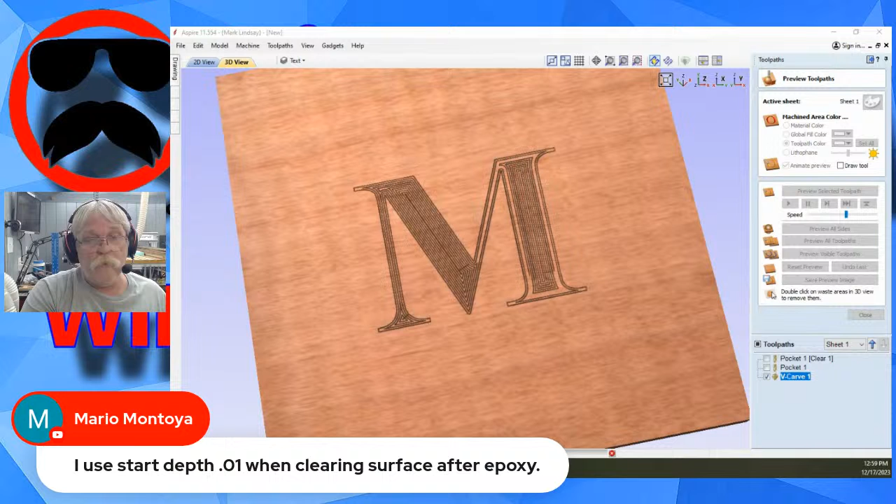While we're waiting for this to demonstrate, Mario Montoya says, I use a start depth of 0.01 when clearing a surface after epoxy. Yes, generally speaking, I do about the same, 0.01. It just depends on what I'm carving.

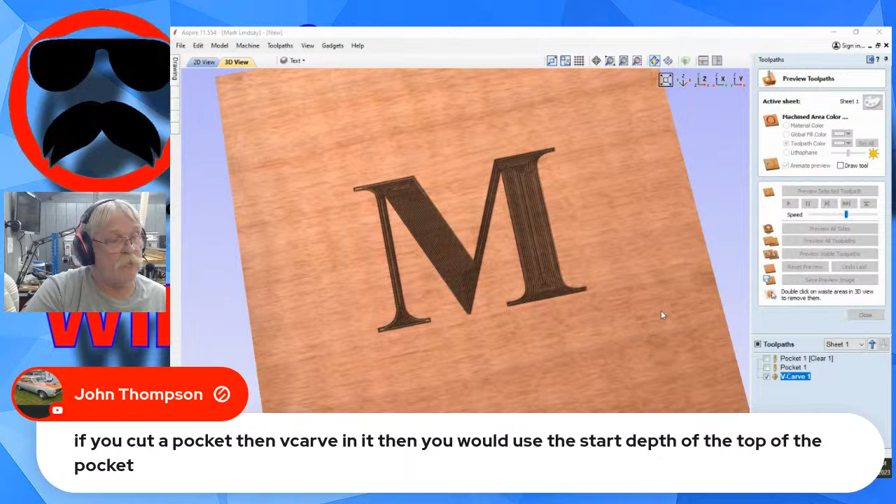So, if you cut a pocket then V-carve in it, then you would use the start depth of the top of the pocket. Yes. If you are going to V-carve down into a pocket, you cut the pocket first, then again let's go over here, place your cursor down in that pocket, and take that Z readout depth. That will be your start depth. And I'll demonstrate that in a minute.

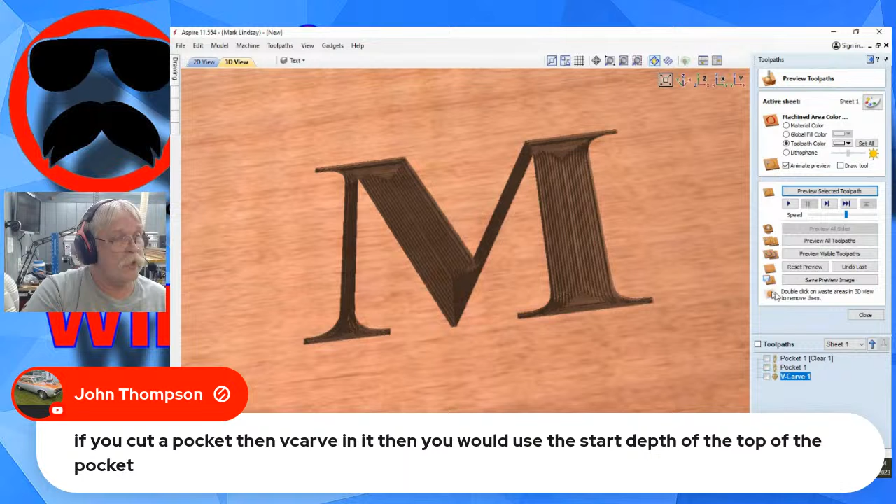This is going to take forever. We're 13 minutes in, but you get the point. It will still let you calculate that, but it's going to cut through the material. And it's told you that. So pretty much, if you're using too steep of an angle without a flat depth, it's going to warn you that you're going to cut through the material.

Okay. Yes, and AL said for completeness, M5 is stop spindle, M6 is tool change. Yes. And then you set up your controller software. If you have a place you want your spindle to move to park while you're doing that tool change, most control softwares have that option.

So, and then M3 is start spindle again. Basically, after you've completed the tool change, set your Z0, you run from here and off you go. At least that's the way mine is set up. But again, I don't use that.

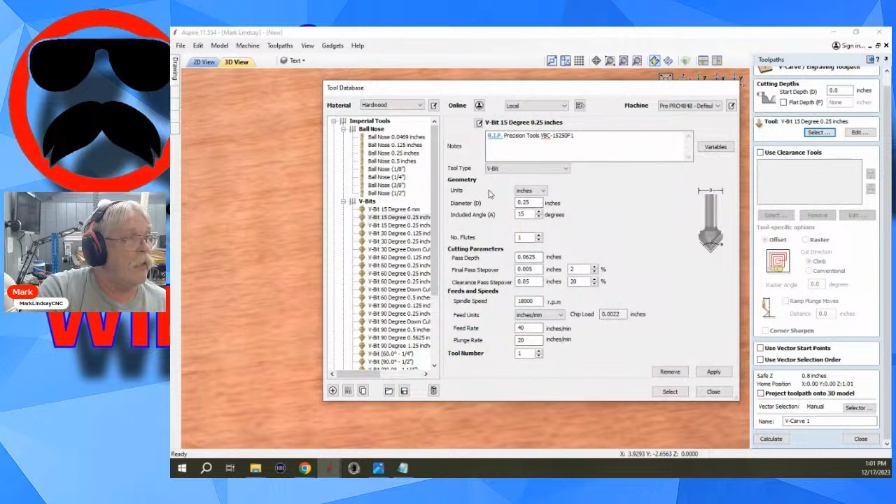So I could use the 15-degree V-bit, but I would also need to use clearance tools with a 1/4-inch end mill. Select a flat depth of 0.1. Calculate it, making no other changes. And then we'll preview those visible tool paths. So the clearance bit will go in and clear out. Then my V-bit will come in and get what it can.

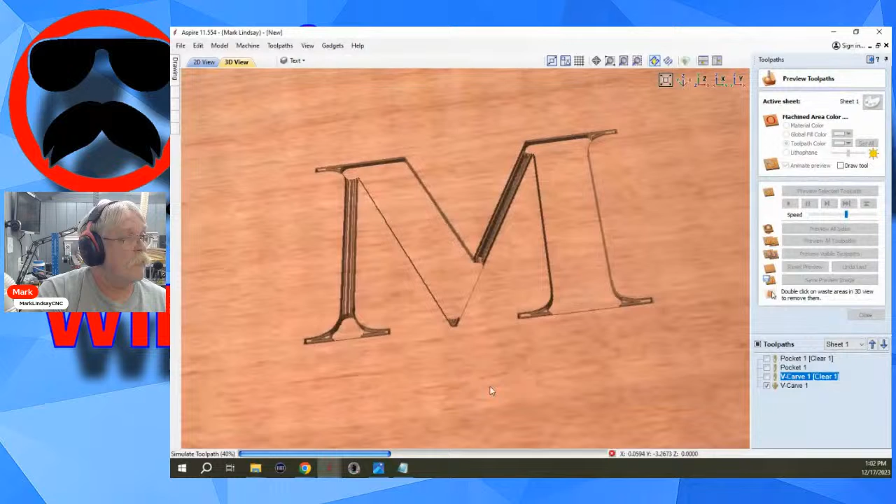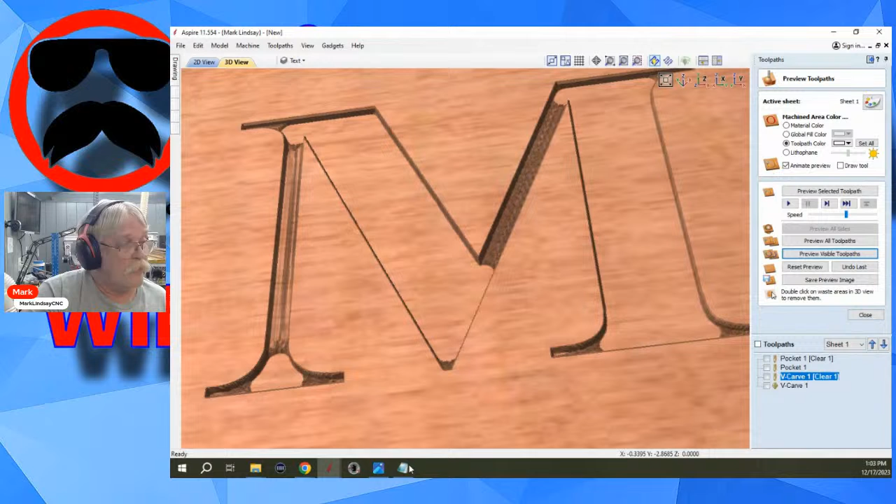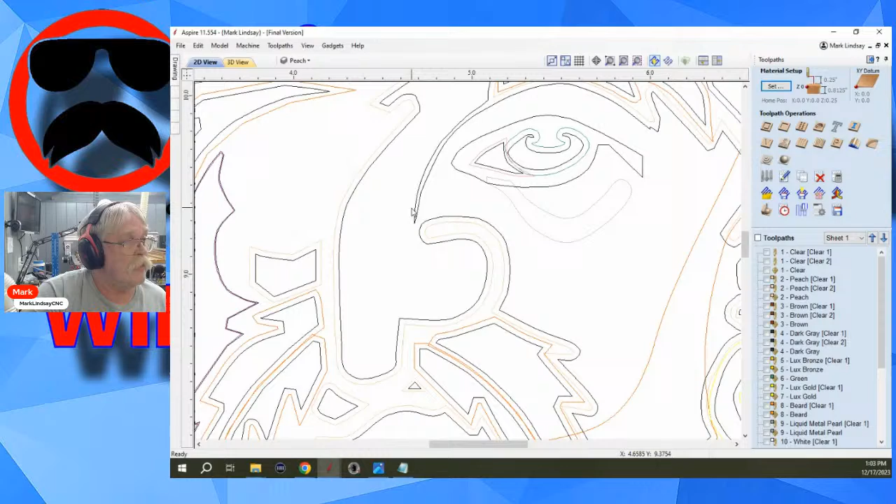This really comes into play when you're doing something like this pirate and you have a lot of thin pieces out here that could be broken loose, something like this. Imagine trying to V-carve along that edge to leave this standing proud. Better to V-carve around that first and then clear out everything else afterwards. That way you're not trying to run a V-bit along this thin, narrow, delicate piece. That's where running the V-bit toolpath first really comes into its own.

So that was a lot of information that went a lot deeper into the weeds than I thought it was going to go.

Nigel Mangrove says for manual tool change, it's best to have your tools stick out the same for every tool. If you can do that. Most home hobby CNC machines, I won't say most, but a good percentage of home hobby CNC machines don't have that option. We don't have a fixed touch plate and a mobile touch plate. Very few, in fact, I can't think of any that do. You could add it and then set up your controller to take advantage of it. But most of them don't come with that at all.

So let's get into some questions. We have a question here from Mike Healy. It says using a 1/4-inch 60-degree V-bit with a 1/8-inch clearance bit, V-bit toolpath first. The bottom looks perfect, but the sidewalls show a line at each level the V-bit goes down. Is this normal when using a smaller diameter V-bit on a wider vector? Okay, so you're using a smaller diameter V-bit on a wide area. That can happen.

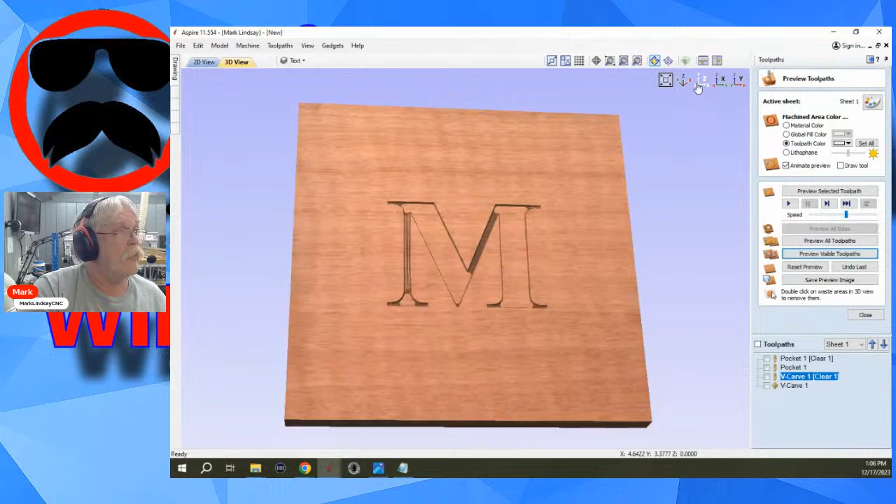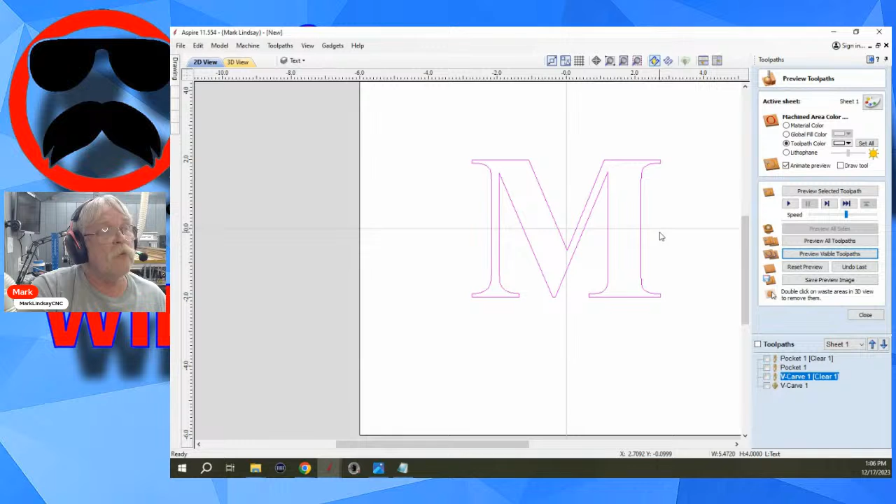Generally speaking, well, there are a couple of factors that come into play here, because it's a narrower diameter. Let me go back into Aspire here, and we'll get away from the pirate. Let's just use this example here. Go back to my 2D view. If your bit is a smaller diameter than the width from here to here, let's say, it's going to have to make this profile pass in a couple of passes. Something with a larger diameter may be able to do that in one pass. It's not guaranteed.

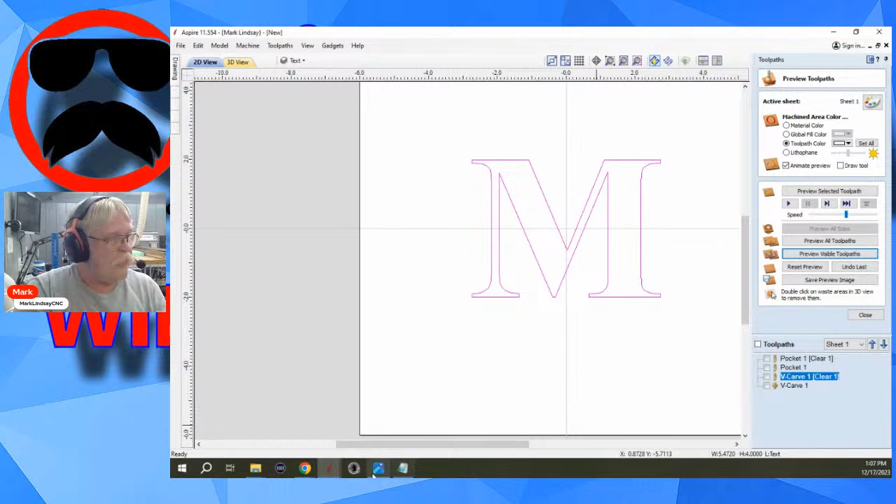So there are other variables in there, the rigidity of your machine. But another big one that a lot of people don't take into consideration is when you say, for example, you're using a 90-degree V-bit. That 90 degrees is a nominal measurement. The angle here on this cutter may not be exactly 90 degrees, but your software doesn't know that. Your software is assuming this is correct and this is 90 degrees. Well, what if that particular bit came out of the factory and that edge was ground at 89.5 or 88.2 or whatever?

That does happen. For instance, I have one 90-degree V-bit that is 90 degrees, but another one that is 89 degrees. So what do I do with that in that case? Well, Peter Pasqualo, over on his channel, CNC Nuts, has a great video on checking the angle of your cutters, of your V-bits, to include free files that you can download from his website that has a test file. It's a CRV file, so it'll work in V-Carve or Aspire, that uses either a 90-degree V-bit or a 60-degree V-bit. But he also shows you how to set up your own file in case you want to check your 30 or your 15-degree V-bit.